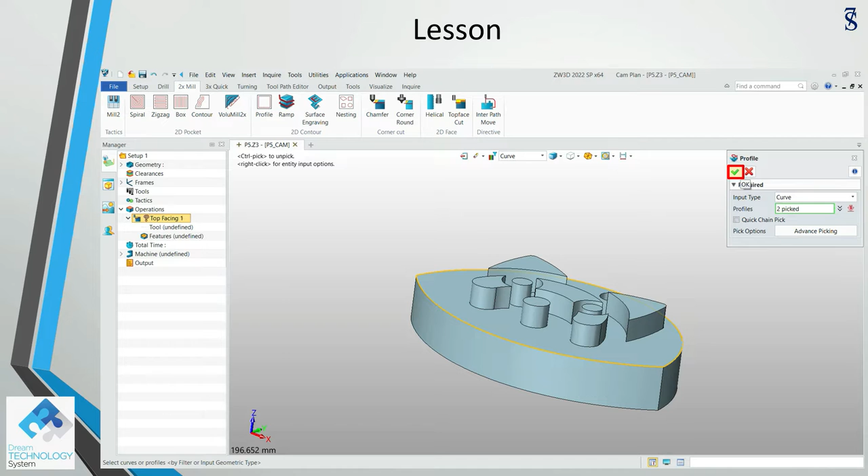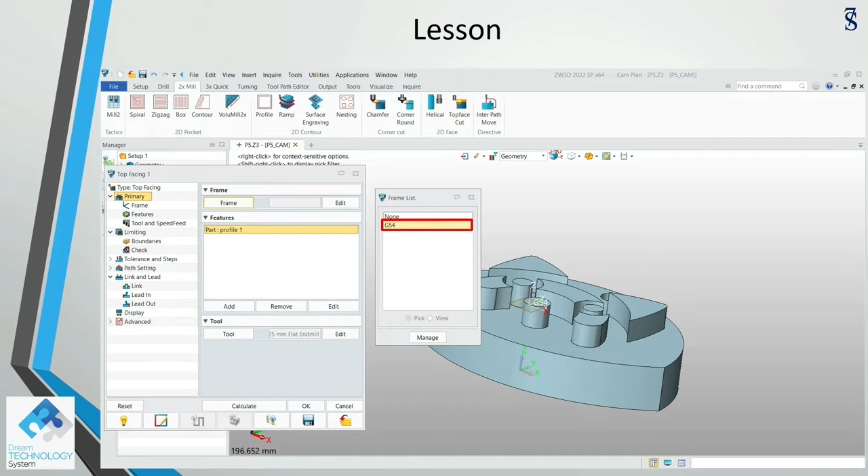Inside, select OK. And we need to load the tool. Load tool shape, go for mill and select a 25 mm flat end mill. Click OK. Continue to set the tool number to number 1. OK. We need to update the parameter. Right mouse click, edit, set the frame G54, RPM and feed rate.

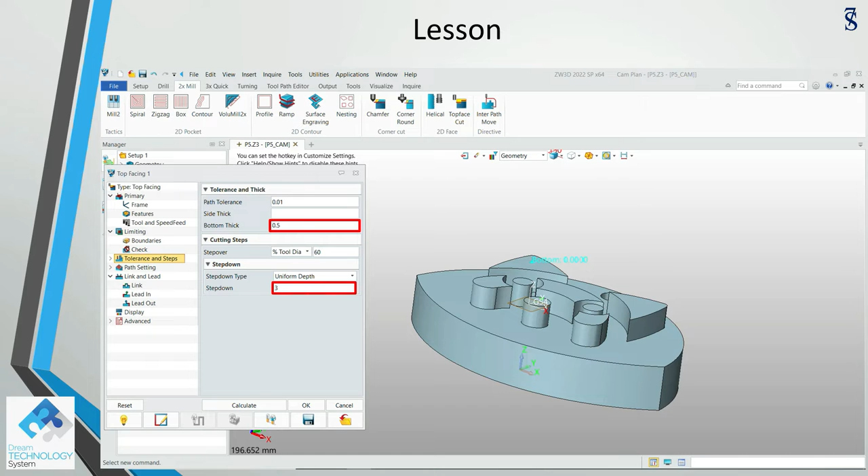We don't want to set the top. I want to highlight to you the difference between setting the top and the bottom. This round, we just need to set the bottom. 0.5 bottom thickness. The uniform depth without the top setting is actually not functioning, but I want to set it to 3 to show you the difference. By the time we do an update later, you can see the difference.

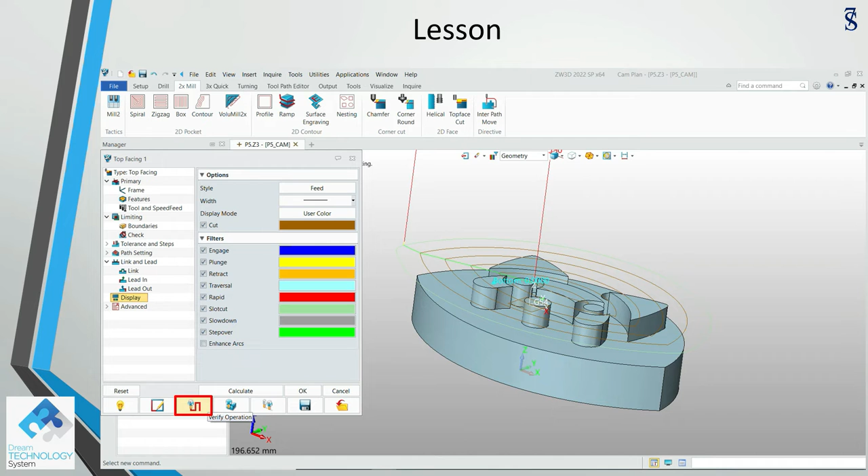Path pattern, spiral step in. We just need to set the engage and there's nothing to do on the retract. Set the color, calculate, looks good. Let us verify. Set the frame. You can see that after we drag the tool, the Z is 0.5 on top of it. Yes, we leave 0.5 for the bottom thickness. Click OK.

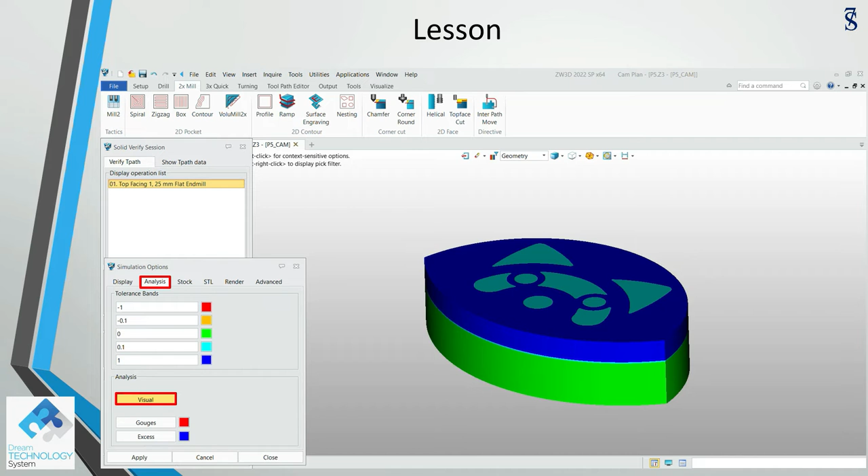Click OK again. Let us perform a solid verify. You can see everything looks good. Analysis visual. We still have material for the finishing cut. Good. Let us save the file.

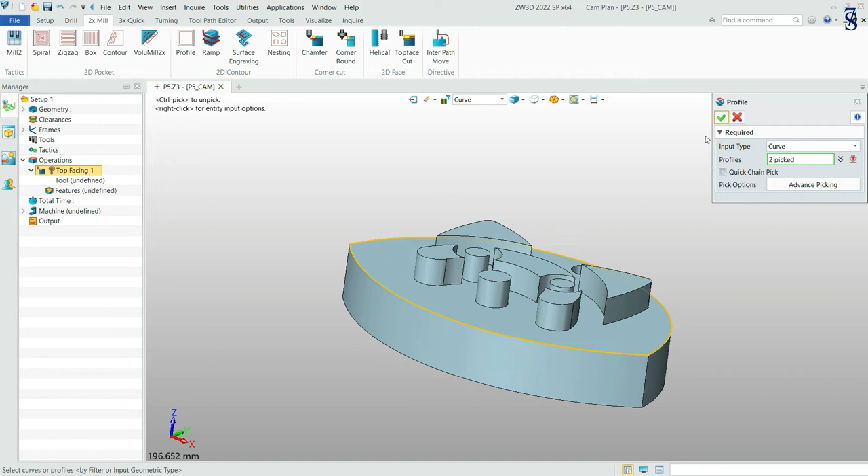Let me switch the screen to show you step by step how to accomplish the task. Hello, welcome back. Let me show you step by step how to accomplish the task. First, we go to 2x mill, top face cut, create, profile, OK. Select the curve, this one, OK. Inside, click OK. Load the tool shape, mill is OK.

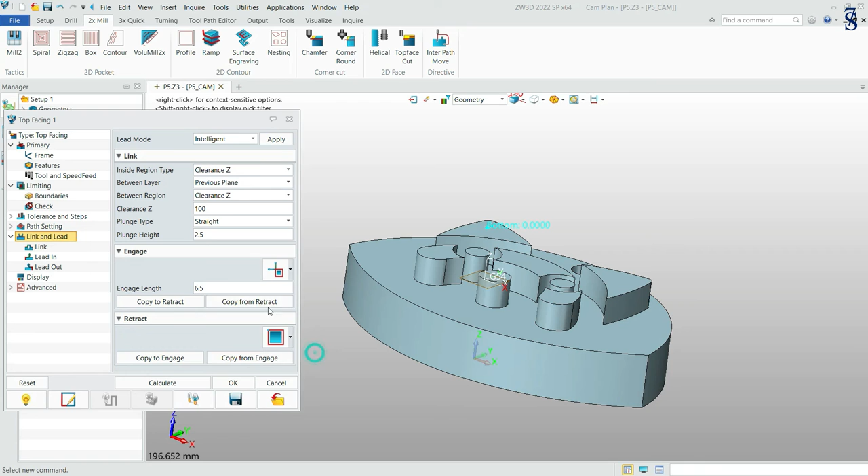And uniform depth is 3, which is not functioning. We just want to show you how it works. Spiral step in. Do not require retract. This one is minus 26 so that we have enough clearance. Change the color. Calculate. Looks good. Let us verify. Set the frame G54 and we can drag slowly.

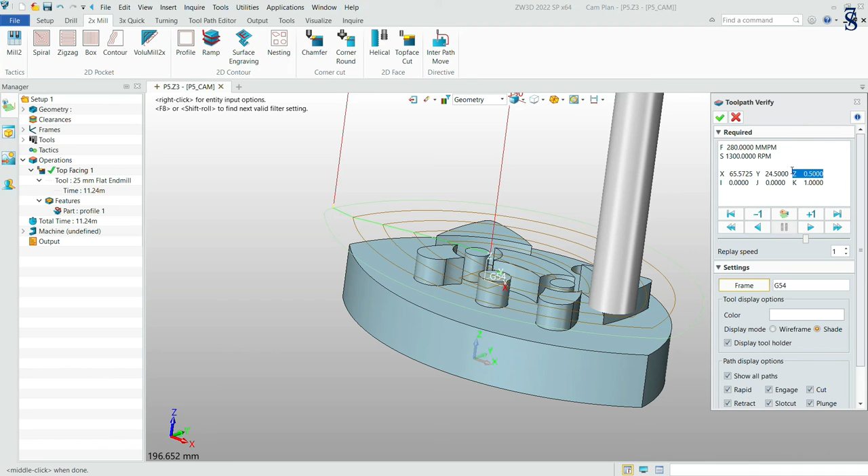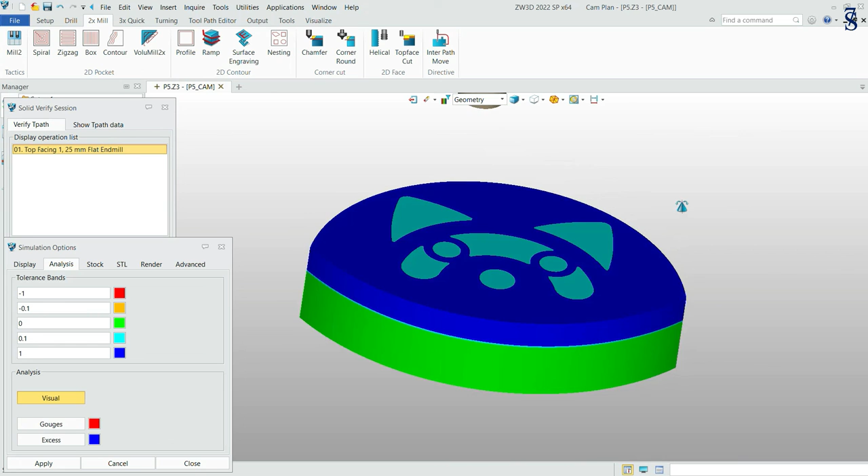Even we can see the detail. Z 0.5, which is correct. Click OK. Click OK again. Let us do a solid verify. Right mouse click. Reduce the speed. Play. Looks good. Let us do an analysis visual. Yes, we still have material for the finishing cut. Looks good. Okay. Save the file.